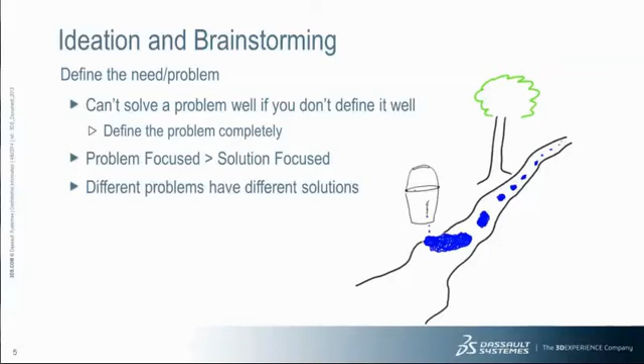So when you define the problem, explore existing solutions. Now, if you're in the intellectual property space, maybe this will require a prior art search or something like that. But see what other people have done and see what's lacking in their designs. If you find a solution that works, if nothing's missing, don't design anything. Don't waste your money. Don't waste your time. You can also look to other industries.

I'll show you exactly the concept we'll be designing today. But look at other industries and see what they're trying to do to help create the product that you're looking to create, but where they're lacking in a certain way, and that's really where the design comes in. And of course, inspire ideas by combining your ideas of what you think would make the best product with what some of the other people have been doing.

So we have a scenario here. We have this need for a folding table that's about mid-range cost, so not too expensive, not too cheap. Clamp top so you can clamp some work and basically have a portable workstation that can also support 300 pounds. And then you want to come up with some ideas.

As I said before, you want to look to other industries. See who else is trying to create a portable work surface or just a work surface overall. You want to come up with quick concept sketches. Now, as you can see below, these are not by any means pretty or beautiful sketches. They're just a way to indicate what you're trying to achieve.

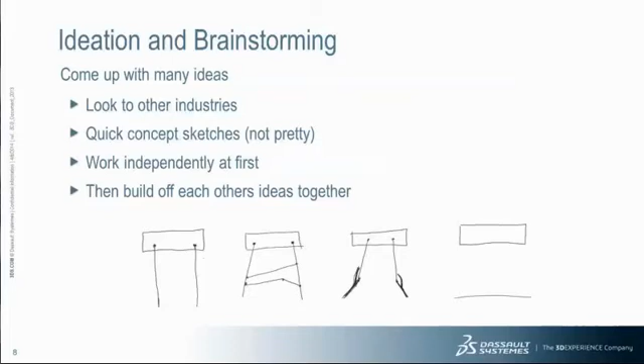Initially, work independently. Think of as many ideas as you can. Get inspiration from anywhere you can, and then build off each other's ideas. Now, when it comes to brainstorming, you sometimes just want to go nuts. You just want to let the mind think of any possible thing it can.

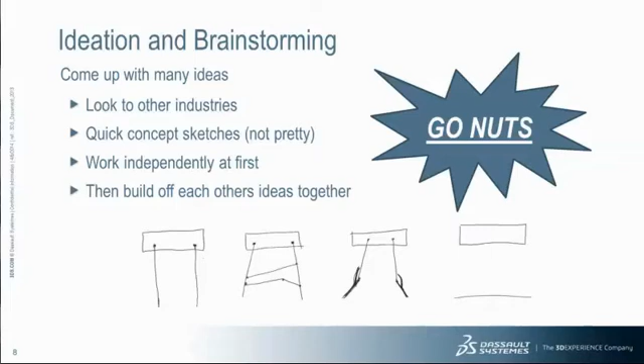On the very right, this is not really that crazy, but in a very docile form of the word nuts, this is just some sort of magneto-levitation. I don't know. It's just a concept, and that's really what you want your brain to do, just to come up with the concepts, so that you don't have to judge anything in the beginning part.

Now is when you want to start judging your ideas. You want to define your needs. What does your solution really need to accomplish? So in our case, we want to make sure it's clamping, it's foldable, it's low cost, and it's sturdy.

So what we did is, because sturdy is the most important thing, we actually biased our weighting scheme so that we could actually figure out what's most important to us. If we had a concept that was able to clamp something and foldable and low cost, but it can only hold up like 2 pounds or whatever it is, that's not going to cut it. So the weighting here helps us determine selection bias.

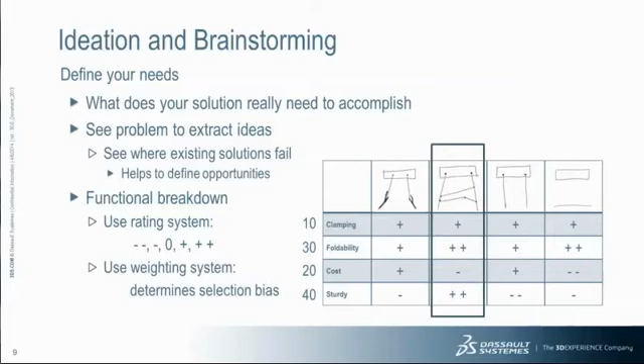So we selected this concept here, and then you want to sort of prove out the key technology. In this case here, we have a 4-bar mechanism that we want to make sure can actually fold properly. So in the general sense of the brainstorming, ideation, concept creation side, you want to do some concept modeling.

I think Thomas Edison said something about how to come up with a good concept: all you need is some ideas and a pile of garbage, just to sort of hack things together and see if you can make some sort of kludgy representation of what you're looking to achieve. This is not the time to set up tooling. This is the time to see, can you find the cheapest way to prove out a concept that you have.

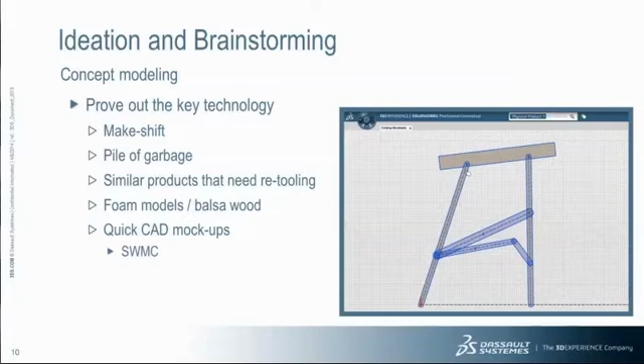There are more sophisticated tools that really help in terms of mechanical conceptual design, and that's where I'm going to start to show you SolidWorks Mechanical Conceptual and how it can help you. So here we have our basic linkage setup, and as you can see, it has too many degrees of freedom. So we're going to lock down another linkage here, so that we go from 2 degrees of freedom just to 1.

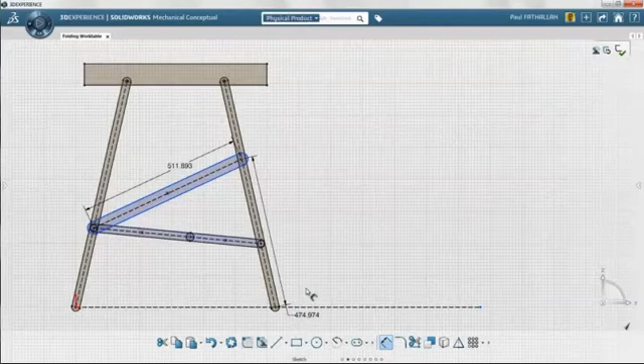So with this linkage here, we're just going to come up with a dimension, just to throw it down, so we get an idea of the overall lengths that we're working with in position. And then we're going to actuate it to see how it folds. So we can see it folds somewhat nicely. We think we can do a little bit better. So let's see if we can play with this dimension here and see exactly how it'll affect the end result.

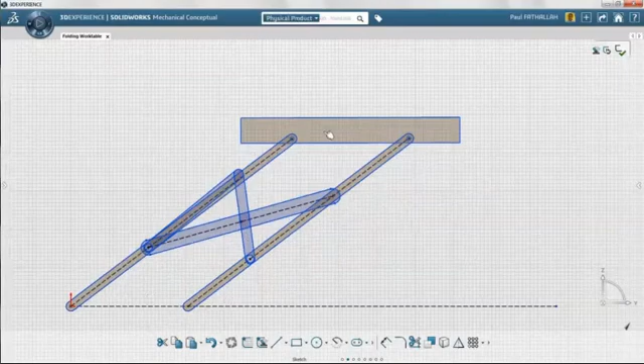So just moving the table back up, we can see that it's working somewhat, but it's not exactly what we want. So maybe we can let this dimension be driven and see if we can squeeze it into place, get it exactly where it needs to be. So we get it nestled up pretty tight. So now we're starting to cook with gas. Now we see that there's about 450 millimeters. Let's just lock it down.

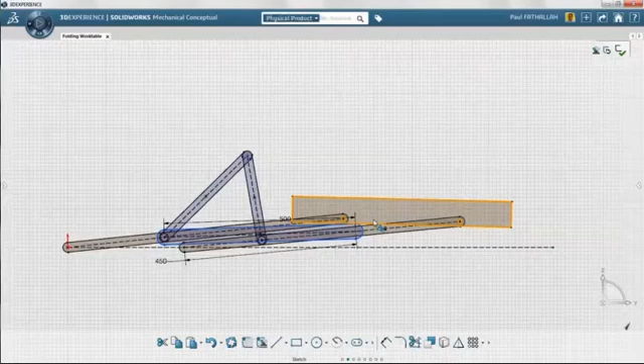Great. So it's looking good. Now at this point, we just want to see, will it now work exactly the way we want? And it does. Lock it up. All right, so it's working. Good. We like it. So now we really want to focus on that part.

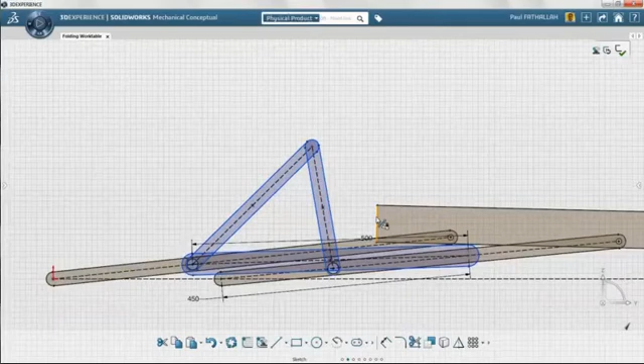As you can see, there's a part here, I'm zooming in here on the left, where it's sticking out like a sore thumb. We don't like that. So what we're going to do is fix down the table a little bit so that nothing moves anywhere. We're going to make those things unrigid. So in Mechanical Conceptual, you're able to make your linkages rigid or unrigid.

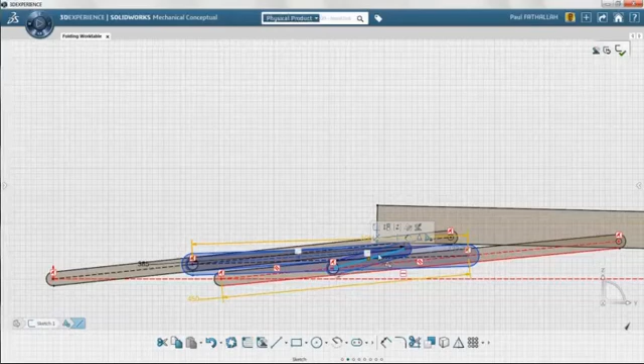So now we remove the rigid constraint so that we can move them to the place that we want. And then all we've got to do is throw a quick dimension on there. Either you can throw a dimension to find its length, or you can go back to the other linkage that we'll do here, and you're just going to make it rigid. So you're just saying, hey, stay the dimension that you are. I want to see how you're going to work.

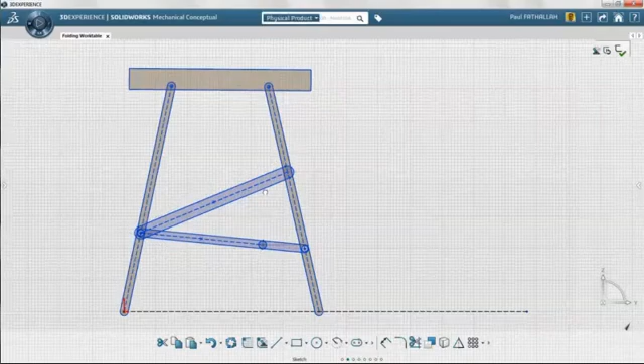So now, oh, I forgot to unlock the fixed constraint. No big deal. Everyone makes mistakes. So bringing it back up to the top, we see that it works perfectly. I should probably grab it from the other point. Sorry about that. So bringing it back down here, we can see that it actuates perfectly. You can do this a few times, and 1, and 2, and looks great.

So now we're trying to transfer these key characteristics, these dimensions that we have, over to Mark. So we're just going to throw down some dimensions so Mark can take this and bring it into SolidWorks so that he can start doing some of the detailed design.

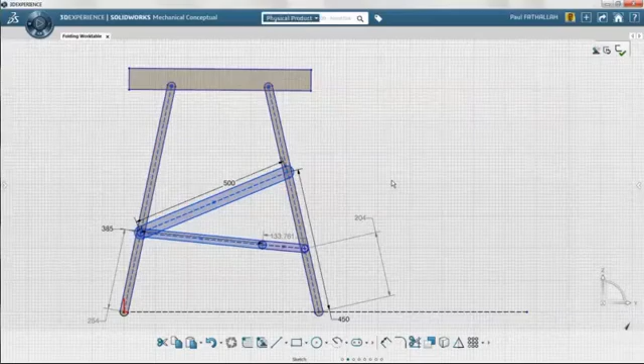And the key here with SolidWorks Mechanical Conceptual is really that you're able to get an understanding of how things should be laid out. It's not about having a final, perfect, detailed solution. That's what SolidWorks is for. SolidWorks Mechanical Conceptual is for the upfront conceptual design. We found 30% of people are spending their time in conceptual design, so we feel it's best to give you the best tools to help you during that stage of the design process. So now I'm going to send you over to Mark, who's going to take over with the more detailed aspects of design.

Hey, thanks, Paul. Before we do that, one more poll question for you. How do you prepare your designs for manufacturing? Is it more of a best guess and trial and error, do you use simulation or validation software, or do you collaborate with your team and come up with the best solution? Only a few percent have voted, so give everybody a chance to participate. Then we'll hand it over to Mark to take that concept through manufacturing using SolidWorks. So let's close this and show the results. And 56%, over half of you, collaborate with your team, and that's the way to do it. All right, let me hand over to Mark.

Mark, are you already presenter? I believe I am. Okay, good. Let me close the poll then. Yep, close that poll and I'll be able to share my screen. There you go. Great. Can you see my screen? Yes. Beautiful. Well, thanks, Cliff.

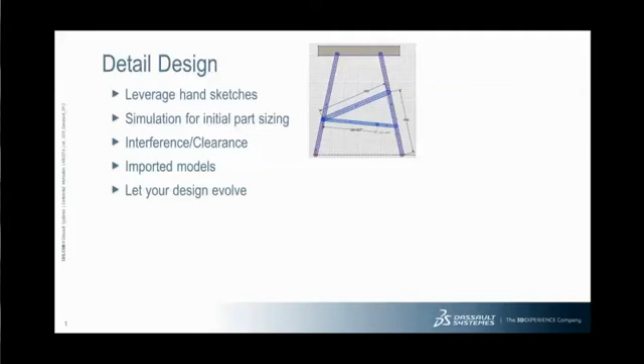Thanks, Paul. So what we're going to do is take Paul's concept and turn it into a product and get it ready for manufacturing. One of the things we want to do is leverage those hand sketches. Paul could have continued on with this design and started building solid geometry, and I could have imported that. I was too impatient. I just took a screen capture, and I'll show you how I was able to leverage that hand sketch.

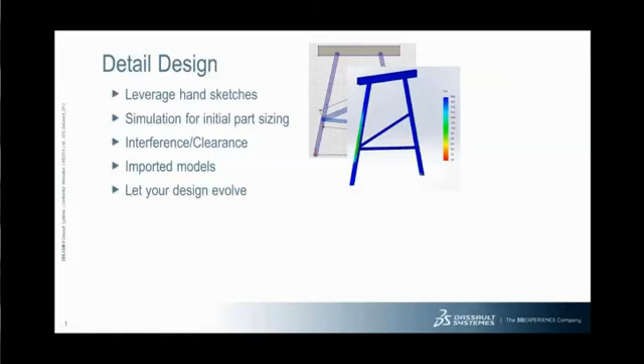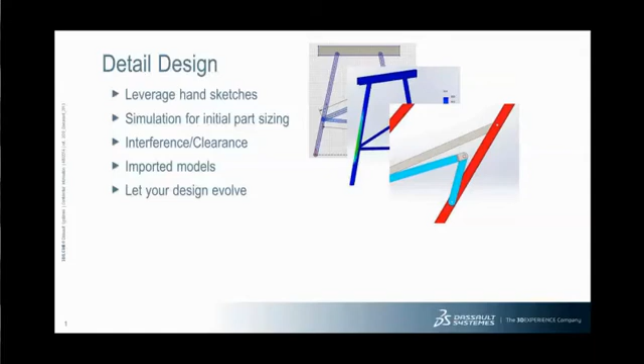One of the other things: how do we know what size legs and linkages, how big each of these parts need to be? So we did some simulation up front for initial part sizing. We also went through some interference and clearance checks. I like to think of design as a very iterative, evolving process. You add some features to make the product function and meet the proper form. But one of the key characteristics of doing that is interference detection, and leveraging other people's models. In this case, we had to import some handles that we were purchasing, and we also imported this little bronze bushing. I'll show you how we went through that.

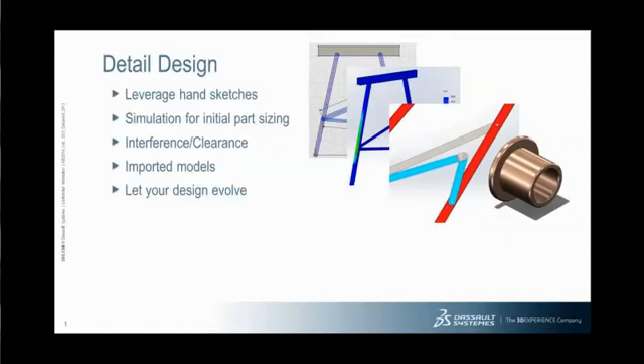Like I said, let your designs evolve. So a lot of this linkage that Paul didn't take into account in his design needed to be done in a detailed design. So you really got to start getting down and make sure things can be manufactured and make sure that things go together and you don't have any interferences. So this is our table. This is what we actually came up with.

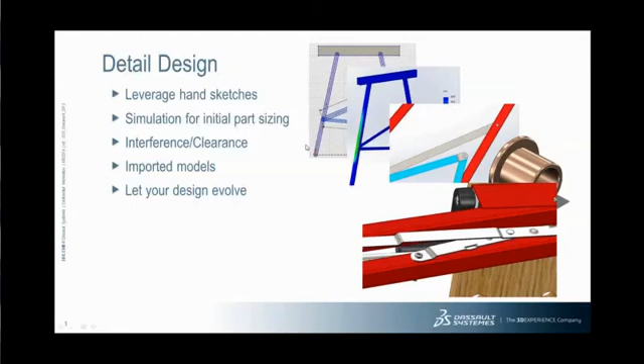So let's jump into SolidWorks here and kind of give you an understanding of where we started and how we got there. So I'm going to start at a very early design stage, if you will. So as I mentioned before, I took an image of what Paul did. So if we look at that from the back, you can see that's an image, and I just brought that into SolidWorks and started sketching over the top of it.

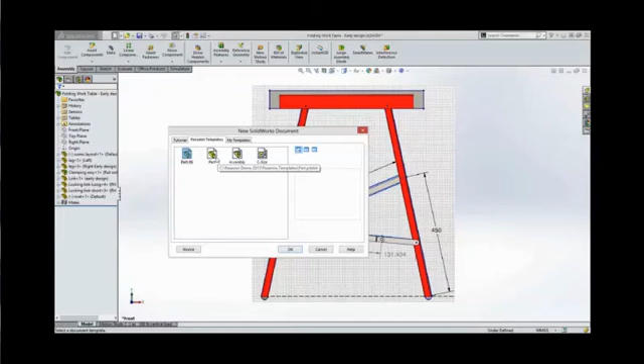Well, one of the key things about doing this is being able to get that image into SolidWorks and getting it at the proper scale. And in the past, in some tools, it's been a challenge. I'm just going to start a new part right here, and we'll jump in and create a brand new sketch and just walk you through the process of how I went through that. We have the opportunity to bring in a sketch picture, so I'm just going to bring this in, zoom to fit there, and you'll see this little blue line here.

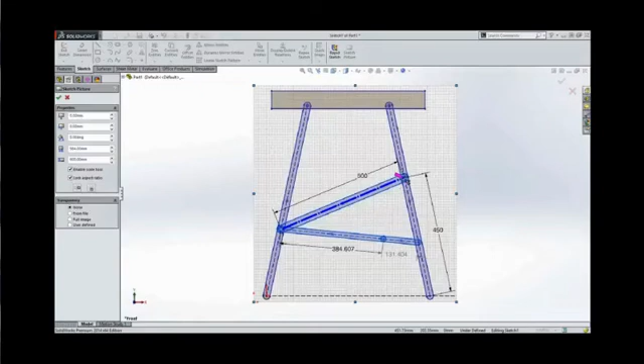This blue line is a sizing tool. It allows me to enable the scale of my sketch. So I'm going to position there. I know that needs to be 500 center to center. And we'll drop that right on the center of that and key in 500, and that scales my sketch to be at the proper size. So that gives me a good starting point. So that's really how I approached creating that first design.

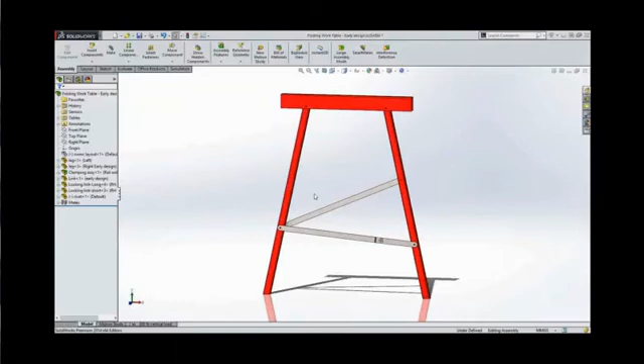I'm not going to save this. We'll just throw that one away. I already have that portion of it done. So we'll hide this guy here, and that's how we sized each of the lengths of each of these legs. Obviously, the key critical dimensions that Paul gave me, I was able to leverage and key those values in directly, but I needed to get started somewhere.

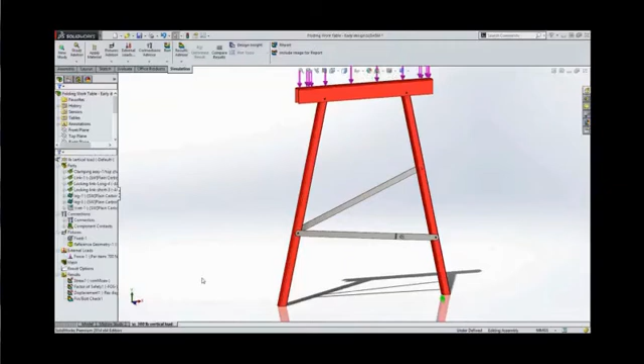So the next thing we did is we tried to figure out, okay, what size tubing do we need? We're going to use tubing for the legs, little C channel up here. What size material do I need to use? How thick do these linkages need to be? And obviously we have a pretty simple design at this point. So what we did is we leveraged SolidWorks Simulation, added some loads at the top, added some boundary conditions at the bottom, and then we ran our simulation.

So in this case here, you can see I have a list of stresses, but I have different materials. Different materials have different yield strengths, and trying to figure out which material is which can be difficult. So I use the factor of safety plot for that, because it compares the actual stress in that part against that part's yield stress. So it's a much better read for what I'm looking for. So if I zoom in here, I can use the probe tool and just start clicking around and seeing that, okay, factor of safety is 10.

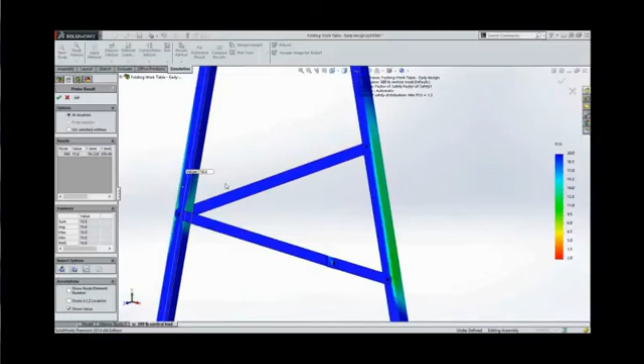Right now I have 20 by 20, 1 millimeter wall, so I really don't want to go any smaller than that, even though my factor of safety is kind of high, and plus our design is going to flesh out a little bit, so things may change. Everything looks good up here. A little bit of maybe high stresses in this area here around this pin, and that's something we might need to be concerned about. But it's just one of those things that allows us to get our sizes.

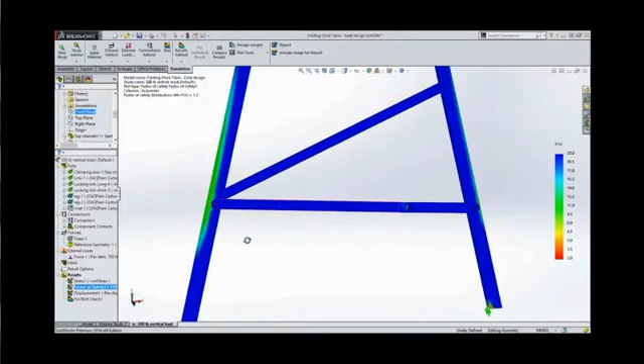Initially, when I went through this, I didn't know how thick these are. These are 1.5 millimeters thick, and that was one of those things I had to go through some early on initial sizing using the SolidWorks Simulation.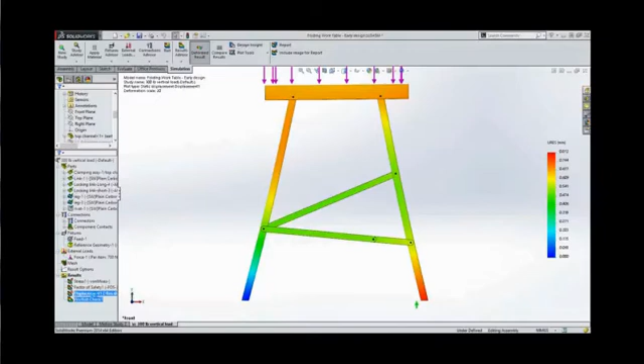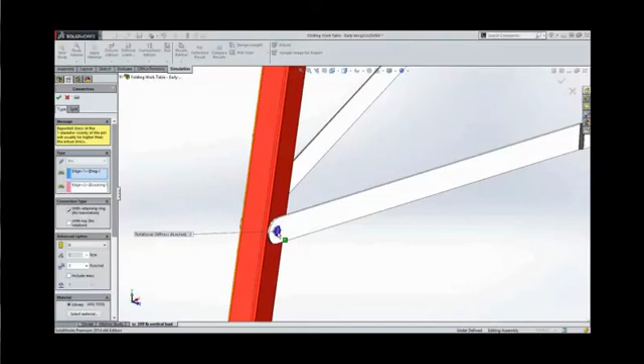Finally, we wanted to size our bolts. So how do we know what size bolts? I could have gone through the process of adding a whole bunch of bolts and changing the sizes and see which one works best. What I did is I actually used the pin connections inside of SolidWorks simulation. So what that allows me to do is just define, without having to define geometry, just define where that pin location is, and then I can define strength data for that particular area and a tensile stress area.

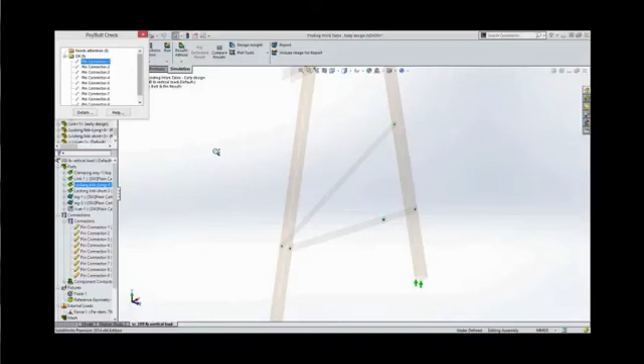So I toyed with those. I ended up coming up with something that was a 5 millimeter screw. I really didn't want to go any lower than a 5 millimeter screw, and you can see that all of my pins are okay. They're in the okay column. None of them need attention up here, which is good information. Now we need to know that. We need to know that stuff for sizing our geometry.

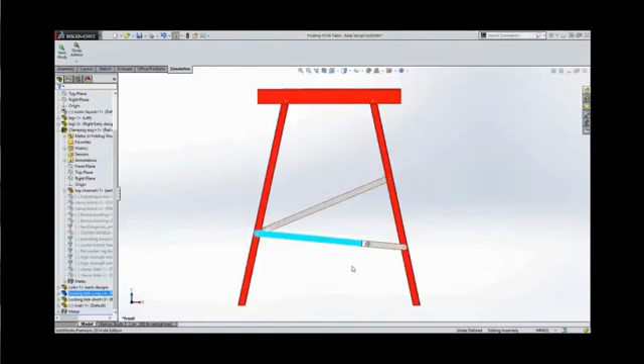So the next thing we did is went through some motion studies, just as Paul did. So we take this guy, run it through its motion. Everything looks like it's performing just the way Paul had done and given us the appropriate dimensions there. Well, that's fine. But one of the things you want to be able to do is check and make sure that as it runs through its motion, there are no interferences or collisions or anything. So I'm just going to go ahead and turn on collision detection here and just drag this part around in the design.

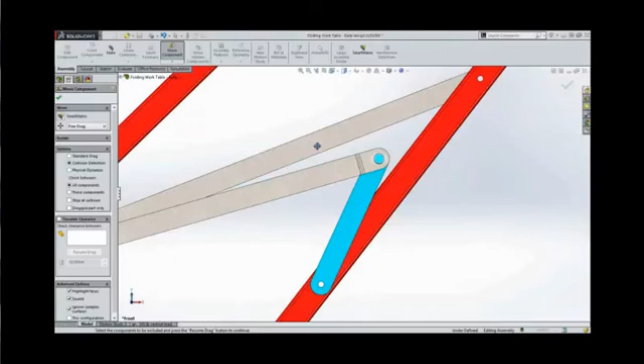It looks pretty good. I get to this point, and it starts lighting up and saying, hey, you got some interferences here. So if I grab this guy, this face is lighting up. Well, if I come and look on the back, you can see the two faces that are interfering are lighting up, and it's showing me right there I have a problem. So part of my iterative process is, hey, I need to make some changes here.

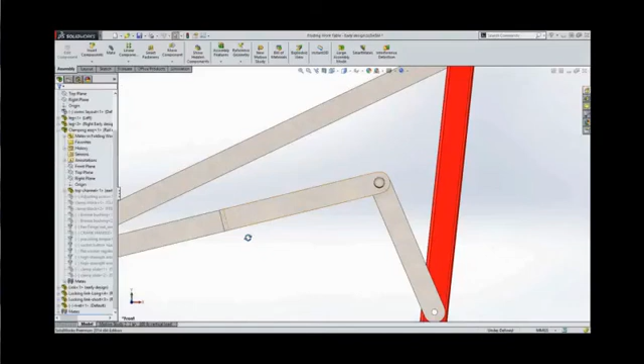So let's just come in here and we'll change the location for that offset there. We'll make this 150. And that's just a sheet metal jog that I added to that part so that it can have a little bit of an offset. And this was part of my iterations going through, hey, I can't get these two to line up. I'll add a little jog in there. Well, let's see how we behave now.

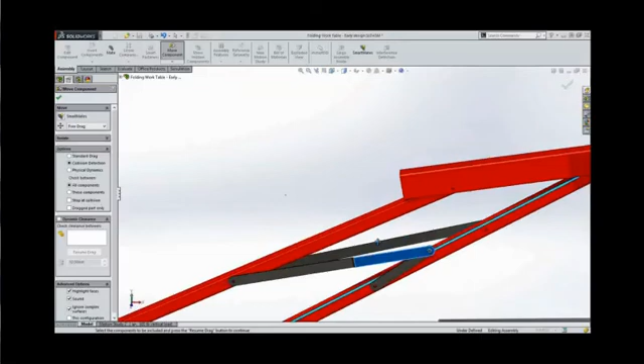We'll go back to our interference detection, our collision detection here, and just grab this part, kind of move it around. Okay, now I'm getting a different interference down here. It looks like something with the edge of this tube. Sure enough, the edge of the tube and the back side of that rivet are interfering. So, again, more design iterations, more changes I have to make to get my design fleshed out completely.

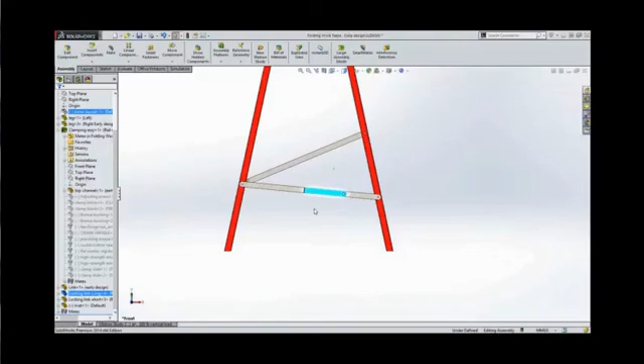Now, since we only have 22 minutes to run through this whole thing, I'm not going to walk you through the entire process. I'm just going to jump back to SolidWorks, jump over to our finished design here and give you a general understanding of how we evolved and got to where we were.

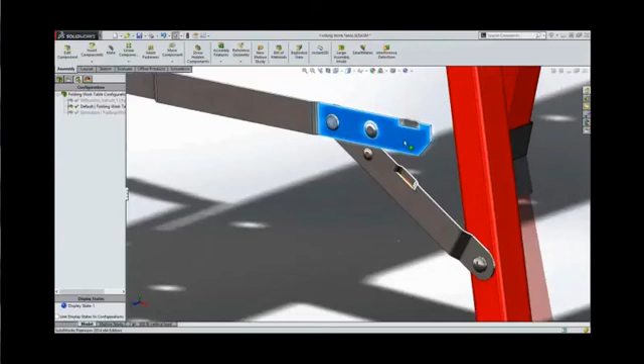So if you take a look at our linkage down here now, we had to add some sheet metal features for the little form tools here to allow us to interlock and kind of give us a snap to an open position so it doesn't just pop open by itself. We don't want that to happen. And this also allows me to lock it a little bit over top dead center there. Allows me to interlock those together and keeps it nice and smooth.

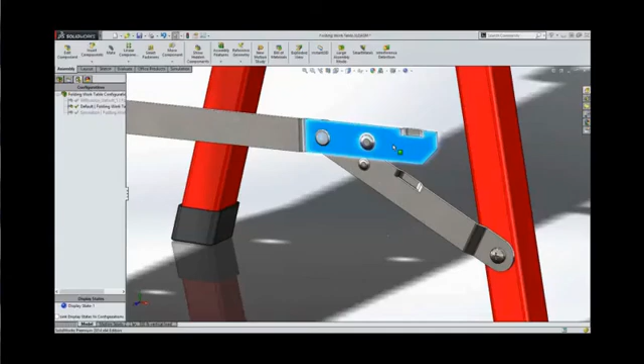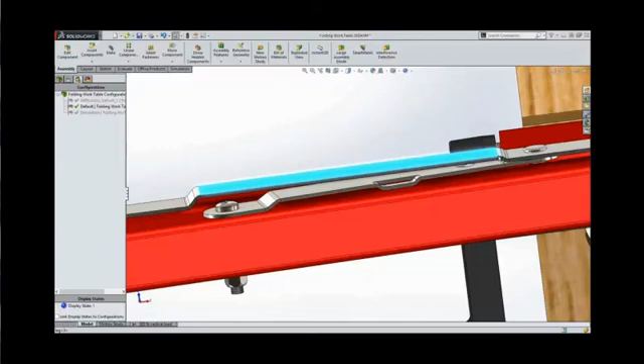So using all those techniques of sizing my components and using collision detection, so on and so forth, this is the design we came up with. So you can see you got some extra offsets and stuff in there. We put some offsets back here so we don't scratch the paint on the side of it. I'm going to fold this guy up here just to give you an understanding why we have so many crazy offsets in there. And you can see that as we fold together, I got to miss that little button right there.

This has got to be away from the side of the tube and can't hit the screw head, so on and so forth. So you can see all the different things that we had to do to go through and come up with the right design for this particular work table.

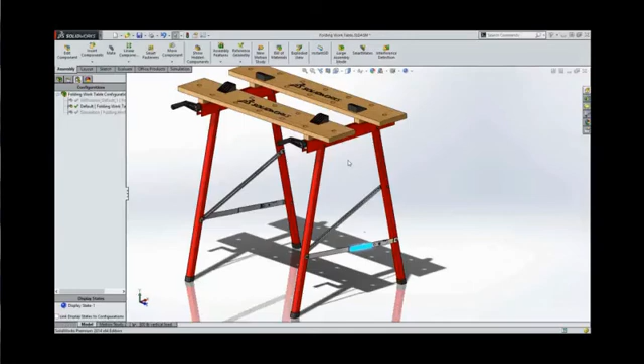So the next thing we want to do is talk a little bit about design reuse. I'm going to kind of just dig into this guy here. This is also part of the design. It's going to kind of cut a cross section of that little subassembly at the top here for our crank. And I'll make this guy here flexible so we can move it around in our assembly here.

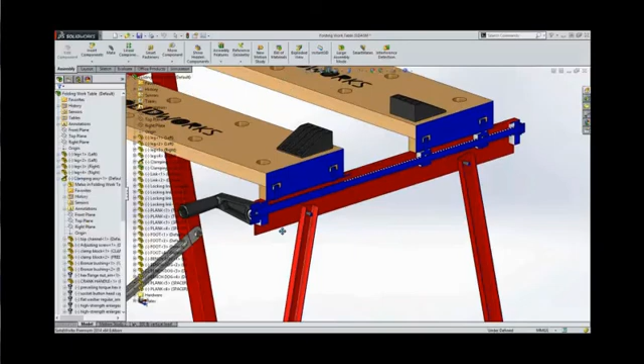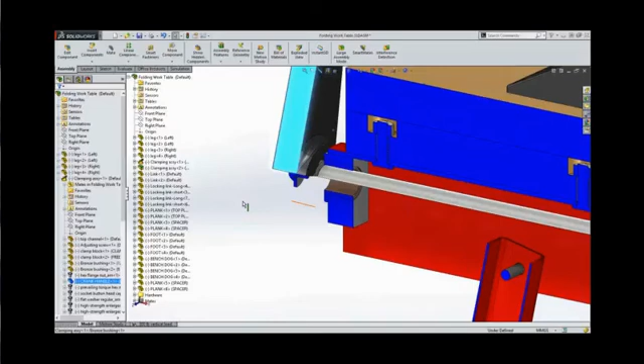So as we come in here, you can see I can grab my crank, kind of run it through its motion. You can see how everything starts to work and how it starts to behave. Everything looks great. But one of the things you'll notice is that there are some little bronze bushings. Since this thing needs to spin around, there's some heavy loads, both thrust and vertically on this. We had to find some thrust bearings to put in there, little bronze bushings, if you will.

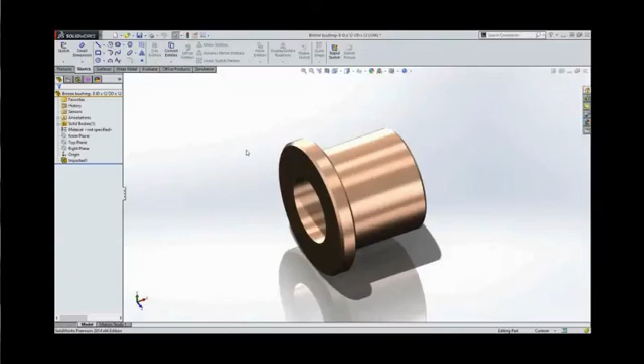So the way we did that is, went to my friendly supplier and was able to download those models. And how do we bring those in? Simple as just opening up an IGES file. So this is just an IGES file here. We can bring in all kinds of types of geometry that can be imported into SolidWorks. And that's how we got items like that in there. Very quick and easy. You go to 3D Content Central, download models, be able to reuse them. No sense in reinventing the wheel there. I've already brought that part in, placed it into my design, so we'll go on with that.

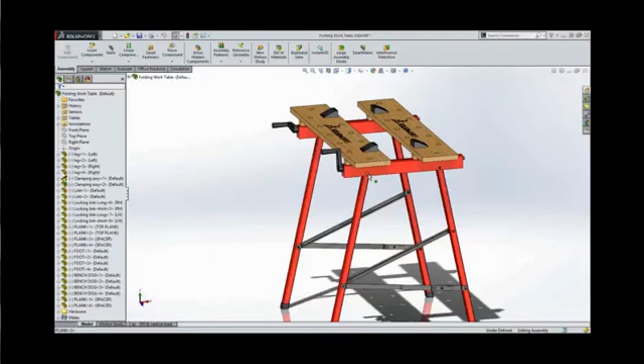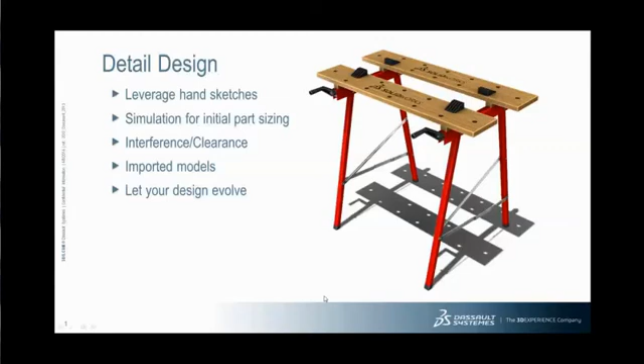And then it's just a matter from there of running through all the design iterations to make sure that the thing works, is not going to break, it functions, it doesn't have any interferences, doesn't have any clearance issues, so on and so forth. And this is what we came up with. This is our idea for our design. So let's jump back to our design. These are the things we just covered, letting our design evolve, and we came up with this. So those are kind of what I think of as the inputs that need to be put into your design to get it to a particular location.

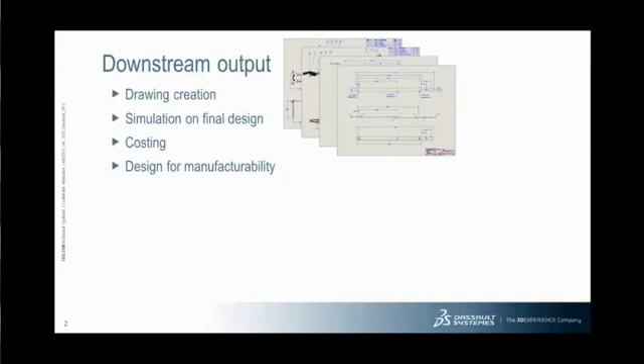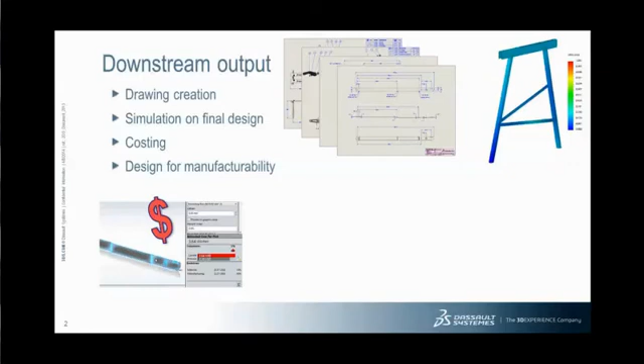So downstream, you need to be able to create drawings. There's still a lot of shops that are only making things from drawings. You need to be able to document that, especially for inspection purposes and so on. We also need to make sure that the simulation that we ran earlier is still valid, and you can see that we reran the simulation on the final model to make sure that we were still valid. How much is this thing going to cost? Is this thing going to be cost efficient to manufacture? Is it going to cost $2,000 to make, and therefore we're not going to be able to sell many of them, right? It's got to add value.

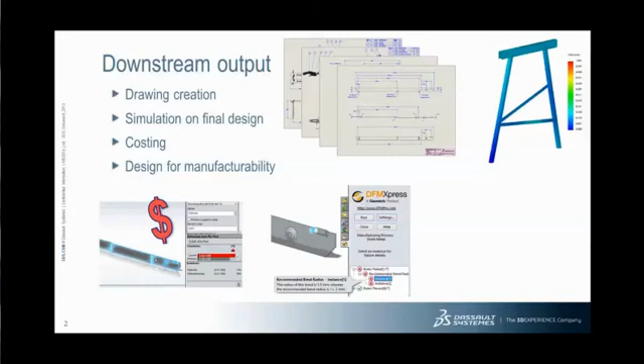And then we'll also talk a little bit about design for manufacturability. When this thing goes to the shop, I'm sure there's plenty of people on this webinar that have had someone from the shop come drag them out on the floor and say, how do you expect me to cut this part? You didn't do it right. You didn't add the dimensions. You put this hole too close to the edge. This hole is too deep, so on and so forth. Design for Manufacturability Express does that for us. So that's a cool little tool. So then we'll show you drawing, simulation, costing and DFM Express. So let's jump back over to SolidWorks here real quick.

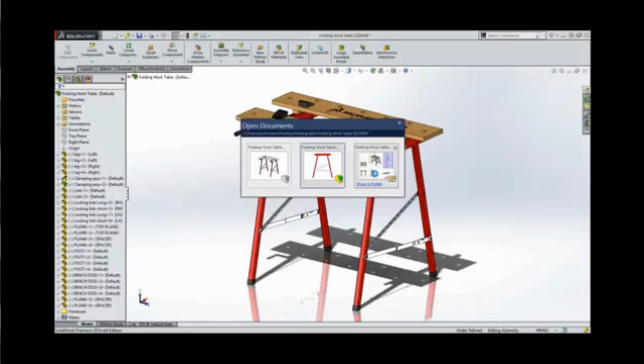So first thing we want to do is we'll talk about drawings. So I'm just going to jump to a finished drawing of this assembly. So obviously assembly drawings are very important. We got to be able to create assembly drawings. SolidWorks is great at doing that. We have our views with all the appropriate annotations that give us overall dimensions. We even have a folded view on here of how it looks in the folded position.

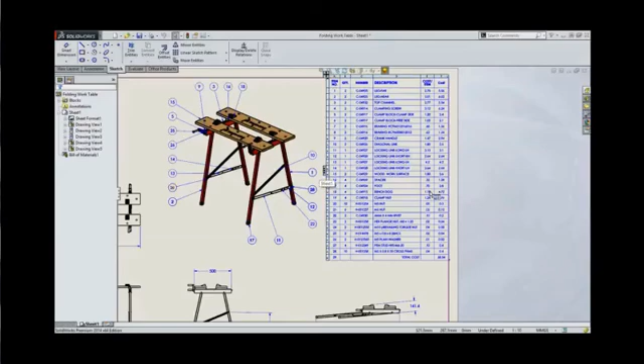Not only that, but bill of material information, all of our balloons to identify that, and then we have costing information, which we'll talk about shortly, and then kind of a rolled up cost here at the bottom as well to give us a general understanding what it's going to cost us.

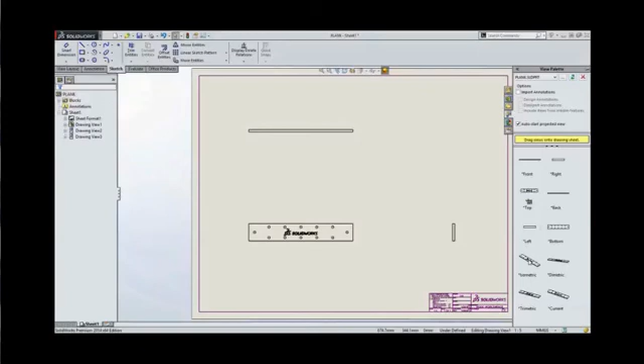So how do we create these drawings? If you haven't seen it before, or you haven't done this before, I'll show you just how easy it is. Fairly simple part here, but you'll see in about 30 seconds here I'll be able to create a part drawing of this particular item right here. We'll throw an isometric on there if we like. That looks good. I don't need any center lines for that guy.

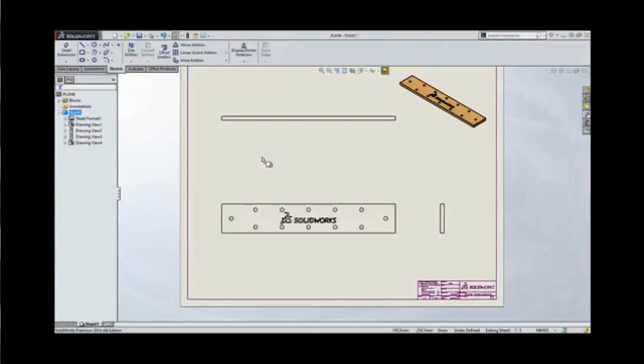Maybe we'll make this view shaded. That always looks nice on our drawings. Maybe even this view we'll change the scale. Let's make that 1:3. Looks a little bit better right there. Now we need to get our dimensions. Well, we used dimensions when we created these features here. So let's just leverage those dimensions and recreate those dimensions right on our drawing.

So I'm able to leverage information that we previously used, get all my dimensions on my drawing for whatever I need to do. So that's just how easy it is to create drawings with SolidWorks. Let's go back to our assembly and talk about simulation. So we had obviously run a simulation earlier, but our design has changed. It's evolved. Is it still valid?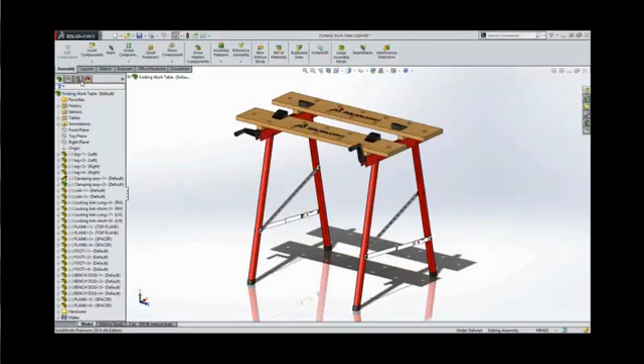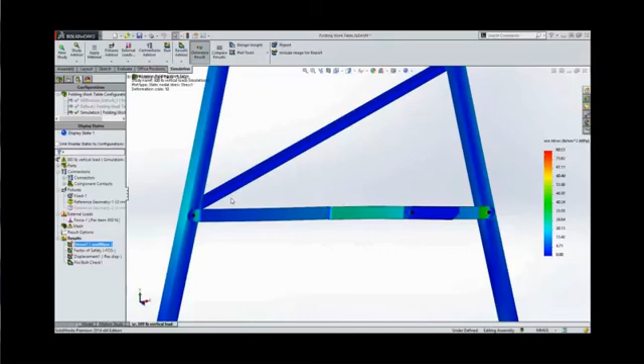Well, let's go ahead and we'll just do 1/2 of it again for the sake of expedience here, and just rerun our simulation on some of our new geometry that we have here. So we'll come down here and take a look at our simulation. We've already run this here. And you can see, again, we have stress information. Notice that we have a little bit more stress in some of these links here now. So that's kind of one of the benefits and value of being able to run this afterwards.

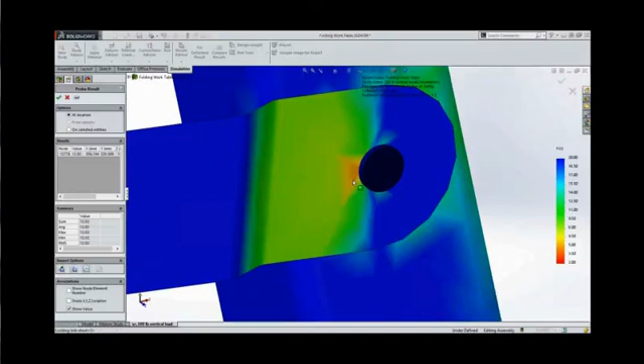How do we know if those are above the allowable limit for this material, including our factor of safety? We'll use the factor of safety plot. And in this area here, again, we can use the probe tool and kind of probe here and say that's got 12 factor of safety. We're pretty good. Maybe over here is something we might need to be concerned about. That's 4.35 as a factor of safety for that one. Again, we're looking for a factor of safety at 2 based on maximum loading, and everything looks pretty good there. So we're good with our factor of safety.

Finally, or not finally, we'll take a look at displacement as well. Notice the red color. This is about 1.54 millimeters. What, maybe 50 thousandths of an inch or something like that. You know, not like it's a whole lot, but you'll notice that the color corresponding to the deflection down here is less. So we have more deflection here than we have in that area there. Just animate that to give you kind of an understanding. You can see how that moves.

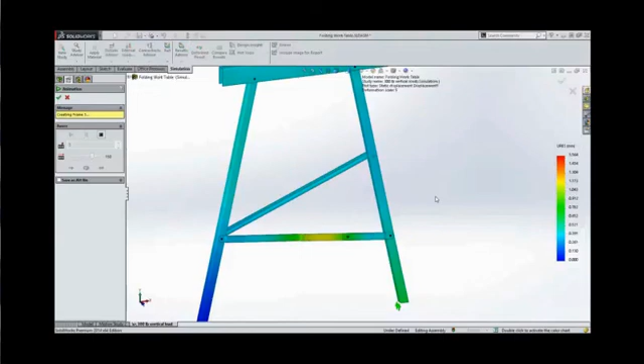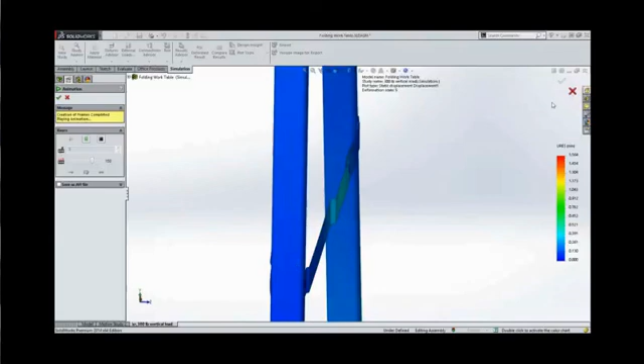One of the things we didn't really account for when we went through our design is that because of the load path between the two legs, and this being offset out here about 4 or 5, probably about 6 millimeters, that actually tends to pull that back in. We only have about 50 thousandths of an inch. It's not a stress problem. It's not a deflection problem. It's not anything to worry about. It's something that we really wouldn't have come across had we not run our simulation again. And again, it turns out that it's not an issue, not a problem. But it's something we needed to be aware of.

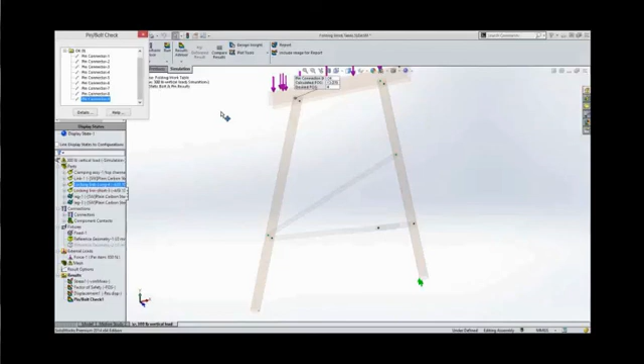Finally, we'll take a look at our pin, do our bolt check again. And again, all 9 of our bolts are okay. You can click on those and see that, yeah, plenty of factor of safety in my bolts. Someone asked me on the earlier presentation, can I get information about those pins? Well, here's each of the pins, the bending moment, torque, shear, axial force, so on and so forth for each and the resultants. So yeah, we have that information.

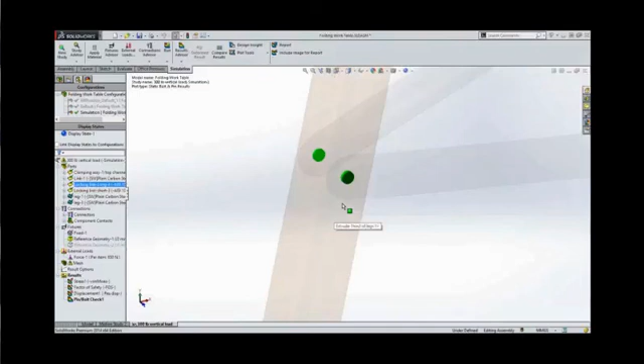It's very valuable and very useful when you're trying to size your pins. The green means go, no go. It's basically green and red for your pins and bolts there. So the next thing we want to take a look at is costing. How much is this thing going to cost?

So let's blast into this here real quick. I'm just going to open up this part right here. We'll take a look at this version here that's obviously got a couple of jogs in it. It's got these form features that we've added. All those things cost money. It costs extra money than just having a flat bar. So how do we know what those things cost? Well, we'll use SOLIDWORKS Costing to do that.

So just run a costing analysis. What this does is it takes into account the material we're using, the cost for the material that we're using. It also takes into account the number of parts that we're creating and the lot size. That's always important, especially for setup costs and stuff like that. Come up with a cost of about $3.64. Where does it come up with these numbers? Well, it all gets added together and divided by the number of parts, obviously.

But you'll notice that, like this laser that cuts the outer cut path around here and each of these holes, it's calculating how much linear distance it has to travel. But this laser says it has 0 cost. Actually, if you look at the tooltip, it says 0.001, which is $20 cost for setup divided by our lot size, which is quite large in this case here. So it still gets added in there, but the setup cost would be a bigger portion of the manufacturing cost had I not divided it over a larger lot size.

So we looked at the cut paths here. Each of these cut paths gets identified, and we get a cost per millimeter of travel for that one. Each of the bends, all those bends get accounted for, and we have a cost to create each of those. We also have costs associated with applying these form features as well. So it's a really good tool for allowing you to come up with that cost information quickly and easily.

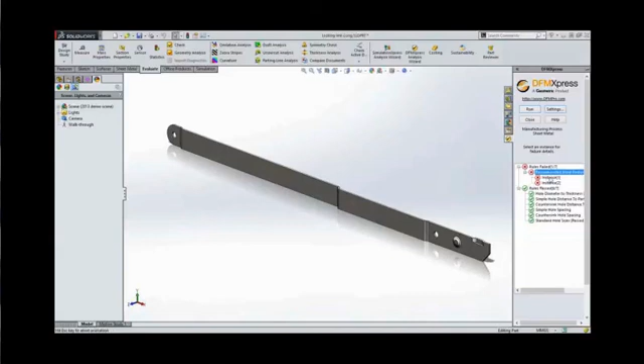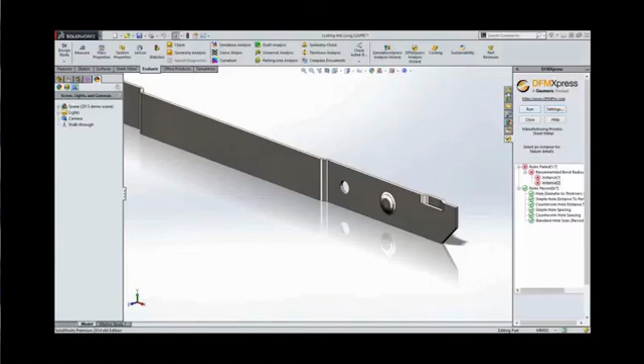In this case here, I actually have 2 rules that failed. Let's come in here and take a little bit closer look. Well, it's telling me that this recommended bend radius is 1.5 when it should be 2. And that's okay. This is actually a form feature. It's not necessarily a bend. So we're going to be okay and just let that one pass. So that one's not going to be much of a problem for us. Let's go back to this guy here. Oh, I don't want to do that.

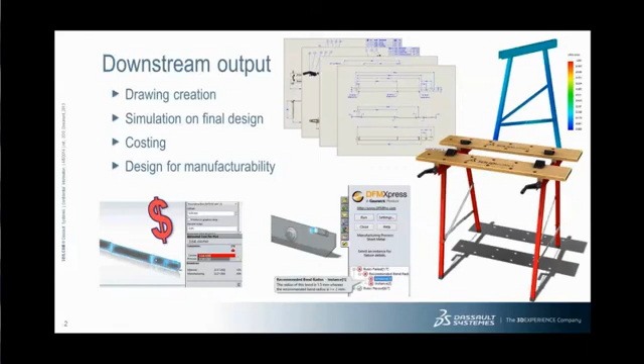So really quickly, we were able to run through and discuss creation of drawings, and so the drawings already created, our simulation, costing, and design for manufacturability. So those are some of the downstream capabilities of SOLIDWORKS.

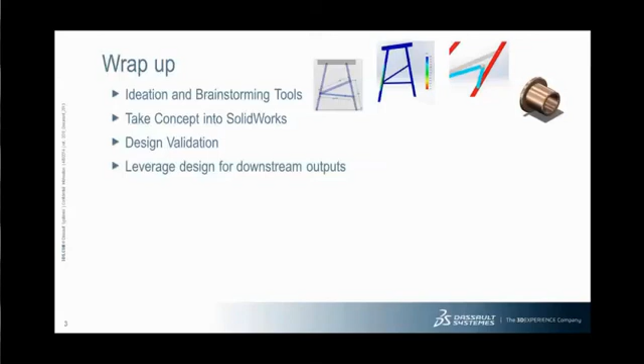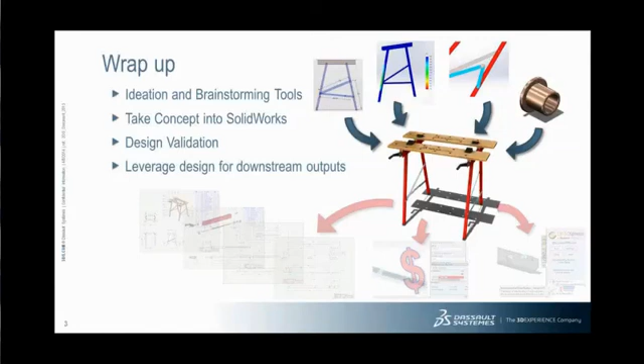So to wrap up this quick little 20-minute demo, and I know we've gone over, we had our inputs, the stuff I got from Paul, our upfront simulation, our collision detection, importing of parts, and we used all that information to iterate and design a new product. And then the downstream outputs, able to create our drawings, get costing information, and make sure that the shop's not going to come screaming at us that they can't manufacture this thing. So hopefully that was a useful little demonstration to show a lot of SOLIDWORKS tools that are available for taking your designs from concept to manufacture.